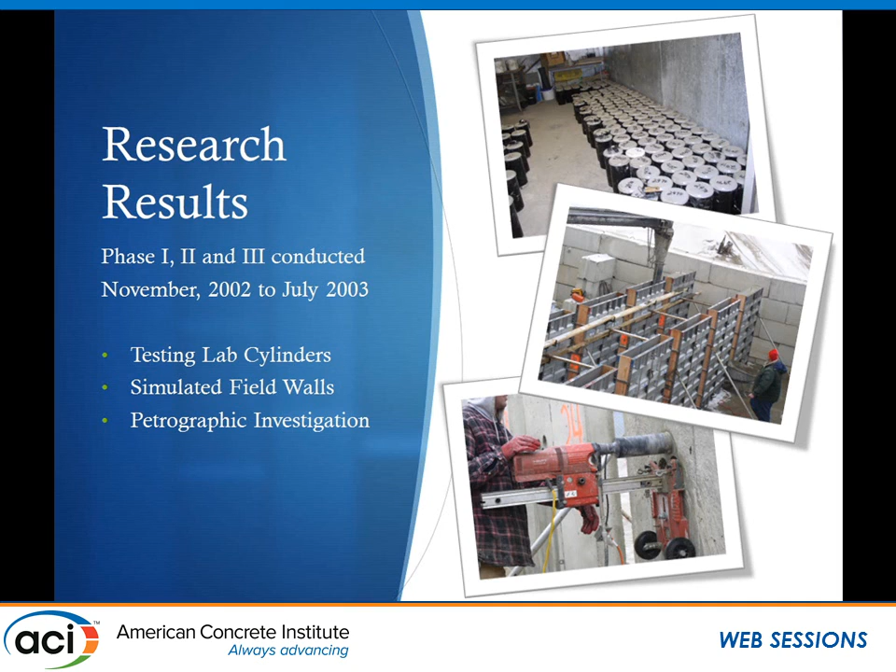What is the homeowner going to get when we walk away and that concrete has frozen or remained cold for a period of time? So those were kind of on our minds.

An excellent team was assembled. You see some variations there, from a research leader, a PE that was involved in establishing the research and monitoring it all the way through, several supplier members - Concure, you're going to hear several times today, was involved in Cemstone Concrete - and then we had a wealth of contractors contributing their time and labor, and ready-mix providers as well, so that we could get the whole job done.

So that team designed the research, and as I said, it's kind of a response to the market. We saw just incredible regional variations - at the same moment, the same winter, the same week, we could see concrete literally not being placed in Atlanta, Georgia, North Carolina, Kentucky, in the 40 to 50 degree range, but still sub-freezing conditions in the teens, maybe even in Michigan. That was a dramatic reason for us entering into that research.

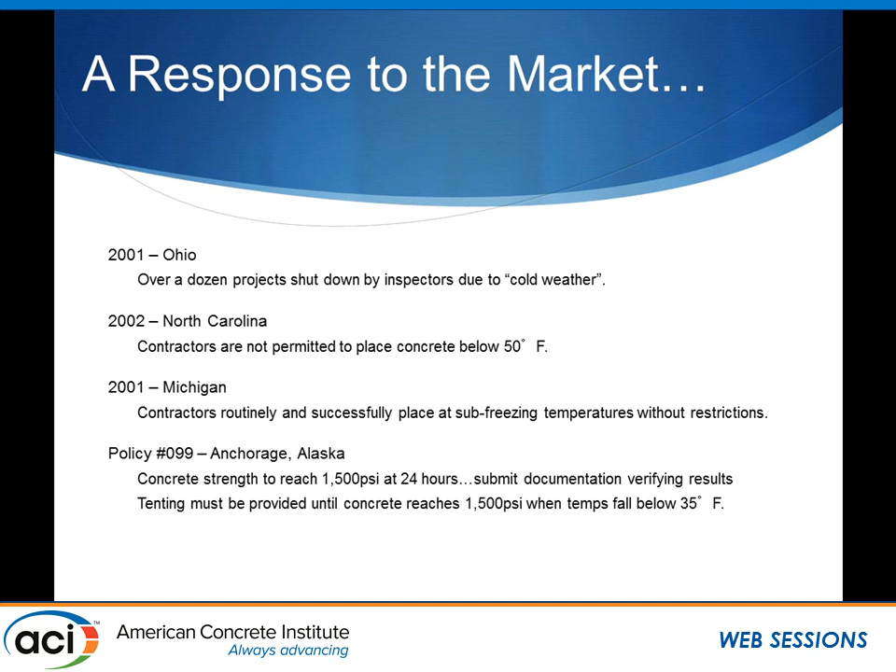Up in Anchorage, Alaska was kind of a featured spot for us, because we had a contractor where their building department would require them to tent and provide auxiliary heat for any residential foundation installed below 35 degrees, until they could determine or prove that the concrete was at 1,500 psi strength. So it was a significant cost that some contractors were having to add to their cold weather production.

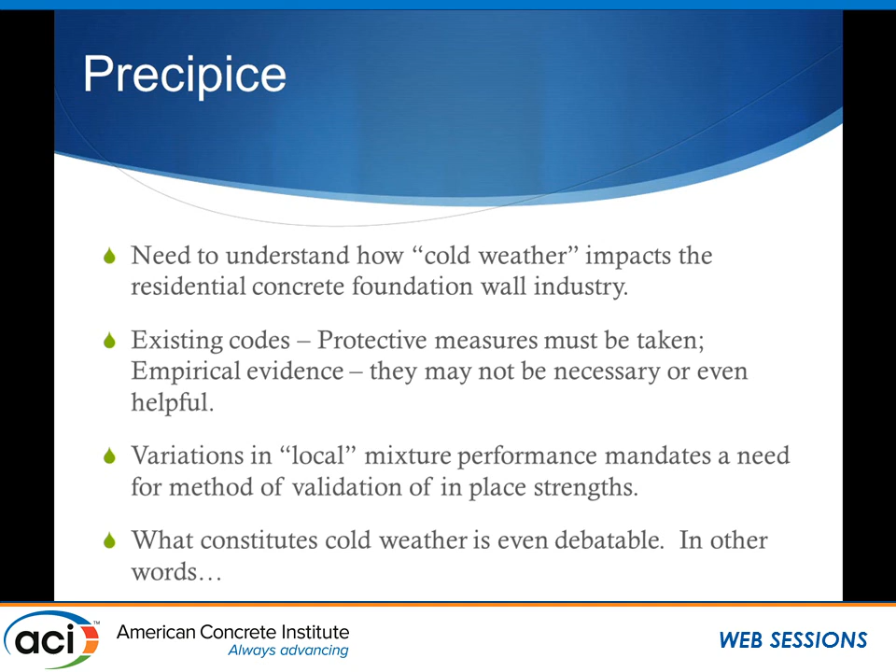So the precipice for the research really is: how cold is cold? What happens in cold weather, and what can we do to design around it and continue to improve the practice of cold weather concrete? Existing codes, guides, and specifications were excessive in terms of application to contractors, in both measure and the empirical evidence out in the field - versus the relationship to 306, for instance, which showed a departure of some 50 to 70 years of monitoring and empirical placement practice, evidence of better performance than what we were currently giving concrete credit for.

So let's look at the different phases of the research. Phase one: laboratory chillers, over 650 cylinders, representing 36 different mixtures, 44 maturity curves, because we did some of those at 50 degrees and some at 30 degrees. We really wanted to prove to Atlanta that 50 degrees isn't cold.

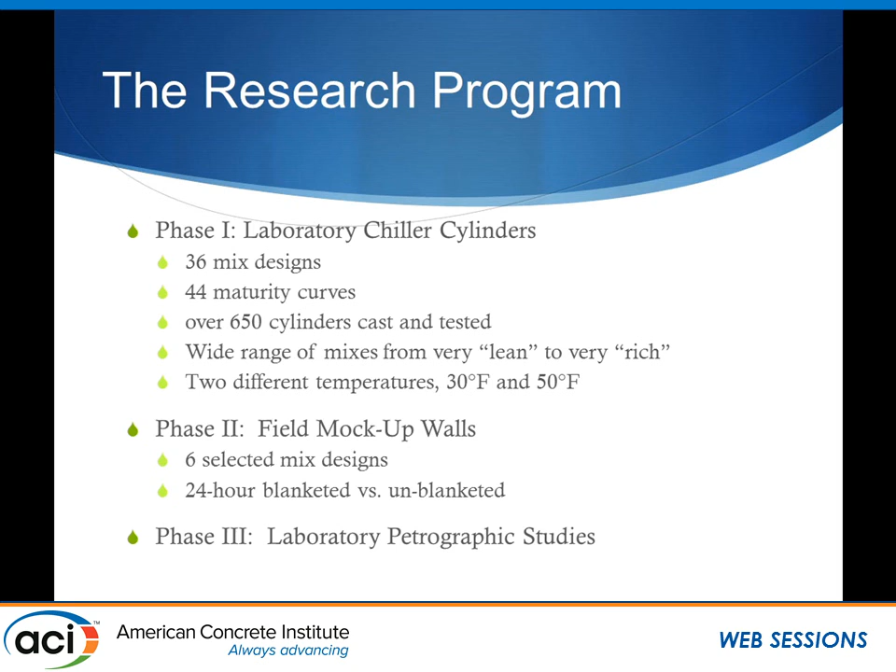Being from Iowa, we know that's not the case. The mixes range from lean to rich, so that we could get an assessment for practical steps you can take when you see target temperatures coming your way. Then when we moved into the field, with the 6 selected mix designs, we blanketed some walls, didn't blanket some walls, and then phase 3 was the petrography to determine durability.

So this is how we got to our mixes. The cements ranged from 5 to 6.5 sacks per cubic yard. They were all type 1 or type 3 cements. Each of those components were mixed with admixtures - 1%, 2% calcium, 1% calcium with a mid-range water reducer, as well as a non-chloride accelerator, a master builder's product.

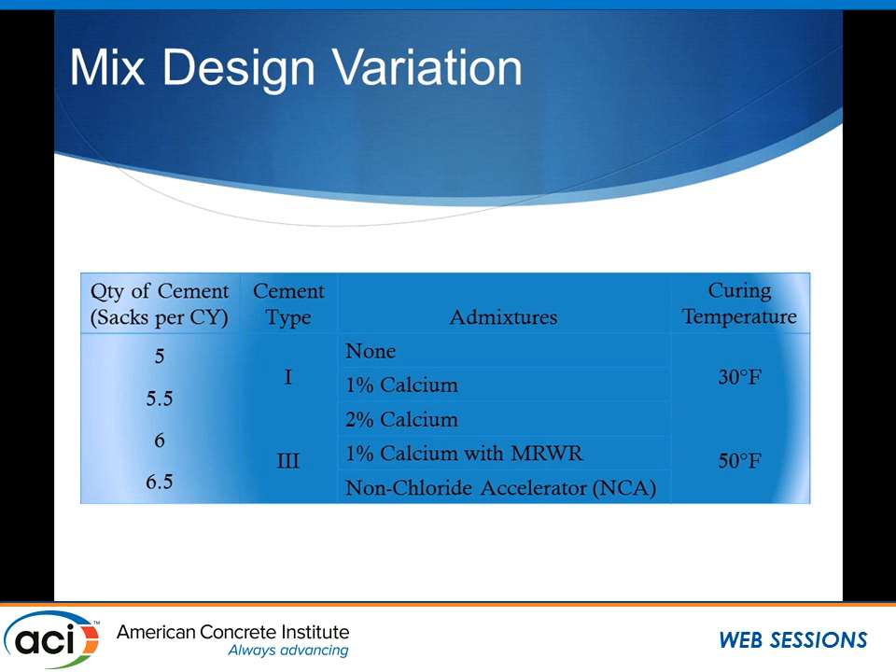The majority of the mixes, 36 of them, were at 30 degrees, and then we had 8 of them at 50 degrees. So you do the math on all of that, and you come up with the 44 maturity curves. So looking at just some of the research, to get a sense for the task that was undertaken.

This is the 30-degree chiller, and you can see the different batches laid out. At the front of each batch, where there's the double cylinder right in front of a row of 3, you'll see the temperature probes that were inserted into one cylinder for each batch, so that we could monitor accurately the concrete temperature.

This was an important part of our research, as we wanted to directly correlate the mix performance at those temperatures to a computer model that we could use to accurately predict the maturity in the field. You know the temperature curve you're expecting, you know the concrete mix design, you've proven its maturity curve relationship - you apply those in a computer and you can determine at what point you need to remove protection, or at what point you need to provide protection, because maybe you got into a situation where you weren't predicting a cold weather snap. So that can be used to more accurately decide your plan for a particular placement.

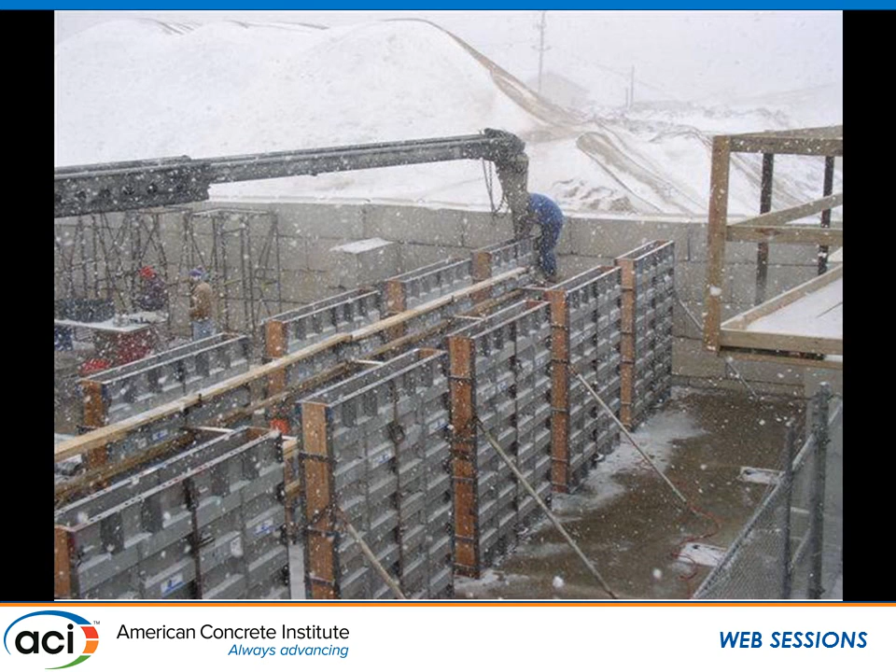When we went outside, we got the best of all worlds. Now, first of all, if I go back just a moment to the chiller, you'll notice that this is a cold weather chiller. It's 30 degrees. It's held at 30 degrees.

It's not ASTM moist cure 70 degree cylinder testing. So we were really abusing the concrete from the start in our phase one, and we really did it some injustice when we got outside. And this is the environment that our contractors are facing, and there's an economic impact in not being able to place concrete in these conditions. Builders are wanting the houses to turn. Homeowners are ready for their home. And if you have to wait 3 weeks or 2 days or whatever the delay is going to be, there's a significant impact to the economic flow of those projects.

When we started the placement, wall number 1 up there in the upper left, visibly snowing. It was cold. I'll show you the daily temperature range at the time. And the temperature was falling, and Ken will appreciate there's no sunshine, so had somebody been out there with a handheld infrared, we've been relatively accurate with our temperatures. Our concrete temperatures, everything was mixed indoors, everything was heated, all of our aggregate concrete was delivered at 65-degree target temperatures. So we wanted to simulate what the environment was going to be at a placement of this nature.

And we even had the benefit of a semi-excavation feel. You can see at the ready-mix supplier, the block retaining wall that they have behind there kind of protects it from prevailing winds, much like an excavation in a residential foundation might be.

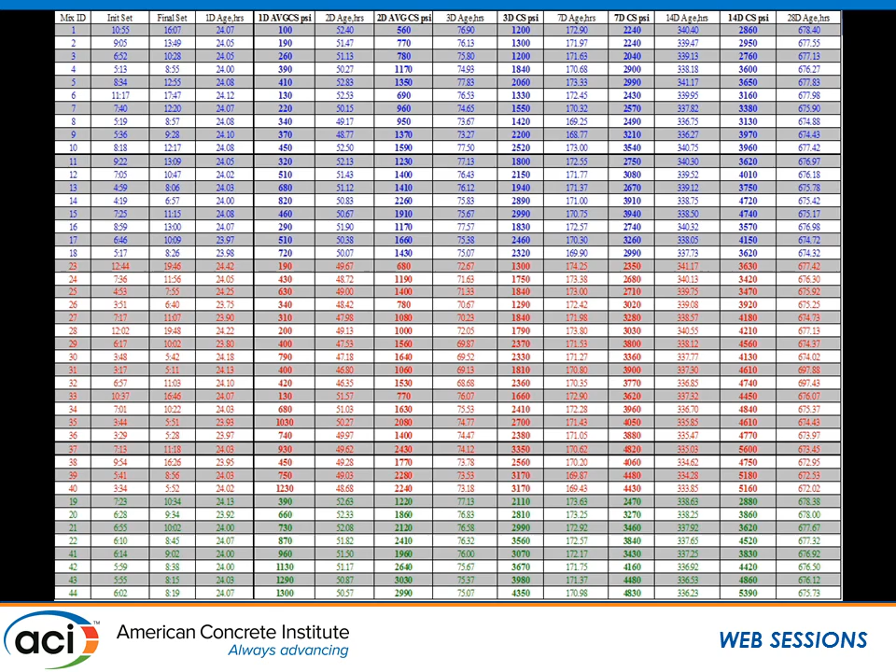So we really were trying to get an accurate assessment at a maintained 30-degree temperature how these concrete mixes would perform. So in essence, at the time that we built this research, we really felt that this was designed to worst case scenario. We could not design a more appropriate way to measure the impact of maintained cold temperatures on concrete maturity in a lab scenario.

We certainly could not have imagined much worse of a case, or wanted to endure, maybe I should say that, endure much worse of a case in our field studies. So the concrete was really, it wasn't babied. It wasn't set up to succeed. It was set up to fail. We wanted to see what the true performance of that concrete would be as it relates to the environment.

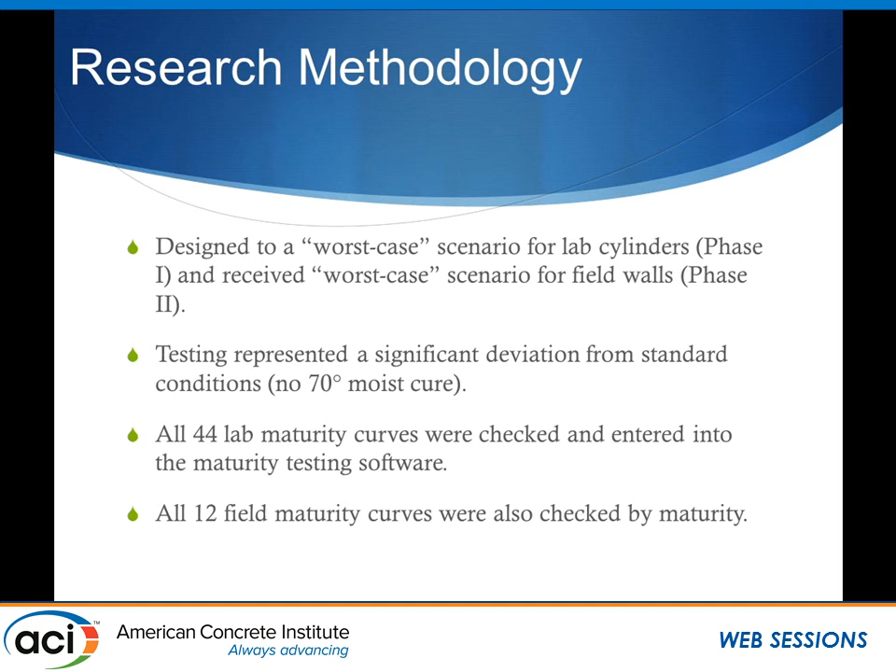And this is an example of what we found at the site. And this is the weather data, NOAA weather data for Cleveland, Ohio, which is where our research was done, beginning January 10th, 2003. You can see that the high for the day was 33 degrees. The average was 27. We were placing, and when they started placement of that concrete, it was in the 31 to 32 range and falling. And then, if you can read that chart, beginning on the 10th, it never got above freezing for 21 more days until the end of the month.

And on the 31st of January, it finally got back above freezing, 39 for the high, low of 12 and an average of 26. So this concrete, by most practical applications, was frozen for 21 days. It was certainly really, really cold for 21 days. Because you'll see a lot of single digits right through the middle of that 21-day cycle.

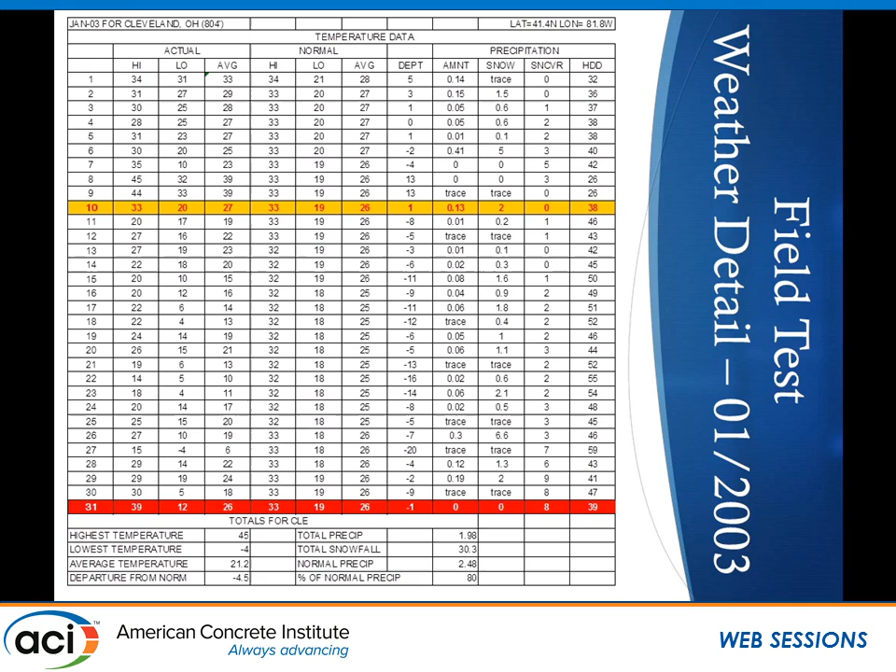More about the physical test, the walls themselves, and really the lab data, the 650 cylinders in the lab - that was to set up what we would find on the field. It was to set up our computer models. It was used to validate the maturity method as an accurate prediction for concrete strength. This is where we really wanted to see the impact.

And so you see the forming panels being removed from those walls. That was the next day, some 24 to 30 hours - just maybe a day and a half after the concrete was placed, we removed those forming panels. So that concrete is also rather green at that point, even in a normal condition.

I've got 5 minutes left? You're kidding me. All right, so you like that. All right, 5 minutes, wow, all right. So let's show you a little bit about the graphs, and you can get to me if you want more detail. But this is what a maturity graph is going to look like. This was our validation of the testing labs. It really seemed like Ken talked longer than 20 minutes. All right, thank you.

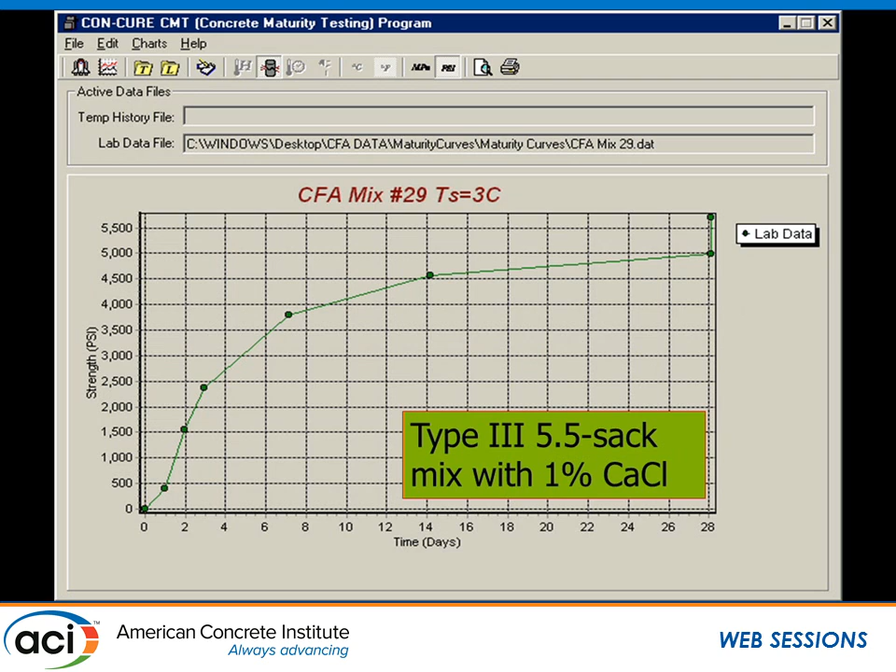Mix 29, so the Mix 3, Mix 29 - these were two of the selected ones we took from the lab out to the job site. Just to show you the difference, this is a Type 1 5-sac mix with 2% calcium. This is a Type 3 5.5-sack mix with 1% calcium. So you would expect higher strength - Type 3 cement, higher strength, should be a higher maturity, and you can see that the strength did gain at a rapid pace.

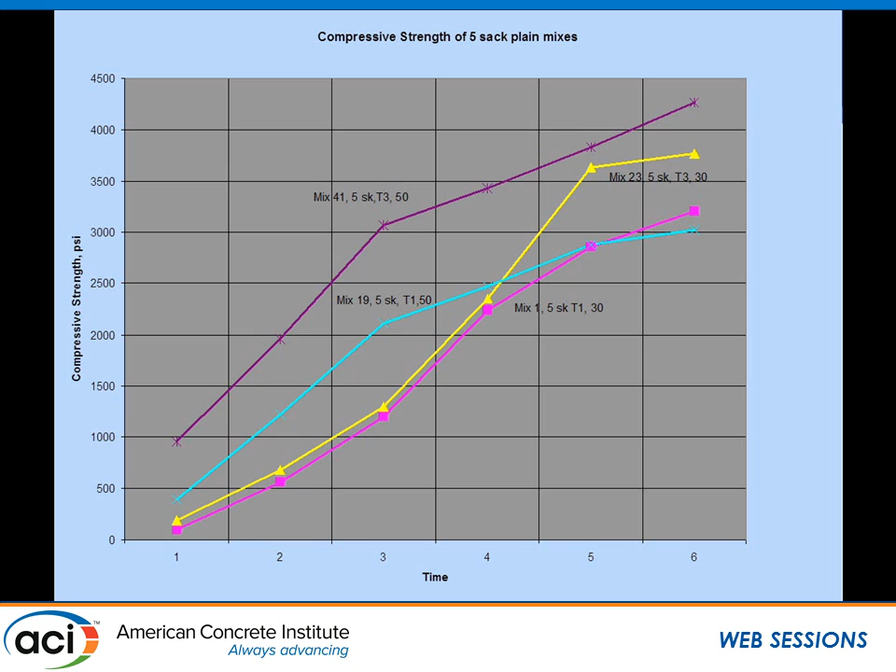What this research really allowed us to do was to look at the performance of all these different mixes and find one that we liked, or find one we thought we could apply to a given situation. So these are all of the 5-sack mixes with Type 1 and Type 3 cement - two Type 1 cements and two Type 3 cements. These are the 4 5-sac mixes with no admixtures, and we get a really good relationship of the impact of Type 3. And there's the 30 and 50 degrees represented there as well, so you would expect the 50-degree temperatures to mature at a higher rate.

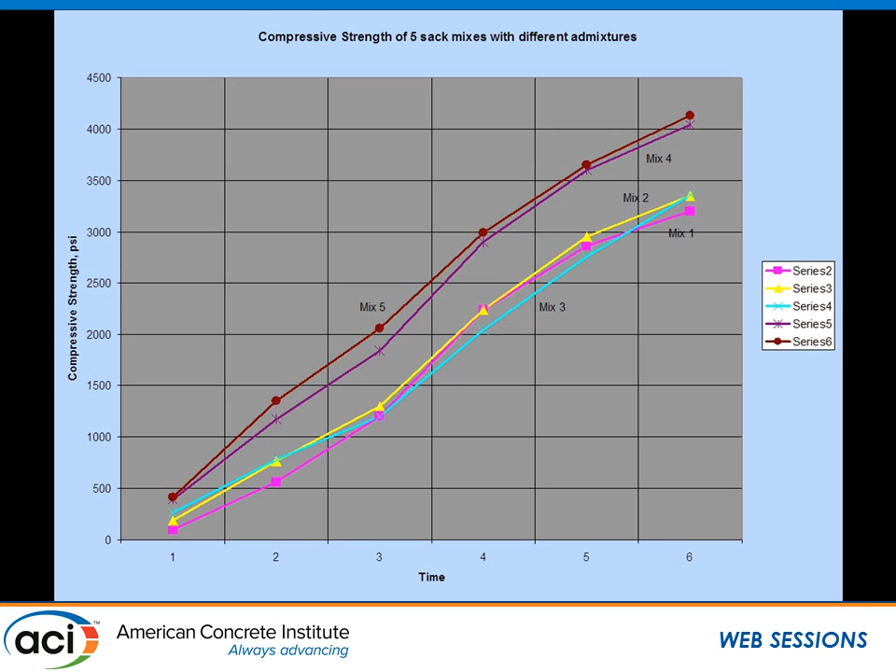This is the 5-sac mixes with the varying amounts of admixtures: no admixture, 1%, 2%, 1% mid-range, and NCA. And so we can get a sense that the 1% with the mid-range and the non-chloride accelerator are the top two lines, and the 2% cal, the 1%, and the no cal were clumped rather closely together there.

This is just kind of to summarize the data for you, giving you a layer looking at 5-sac, 5.5, 6 with the 2% cal and the 1% cal in a table showing the maturity prediction of each segment along the bottom line. So if we look at 5.5 sac, Type 1, 2% cal, the second set of 3 lines, the maturity prediction was 280, 580, 940, and 1690 at 1, 2, 3, and 7 days. We were actually measuring in the field from the cylinders, or from the cores cut from these walls, 400, 590, 1,000, and 1815. So you can see there's a pretty strong correlation between what the computer model predicted after the lab studies, and then applying that to the field, what our prediction was truly going to be.

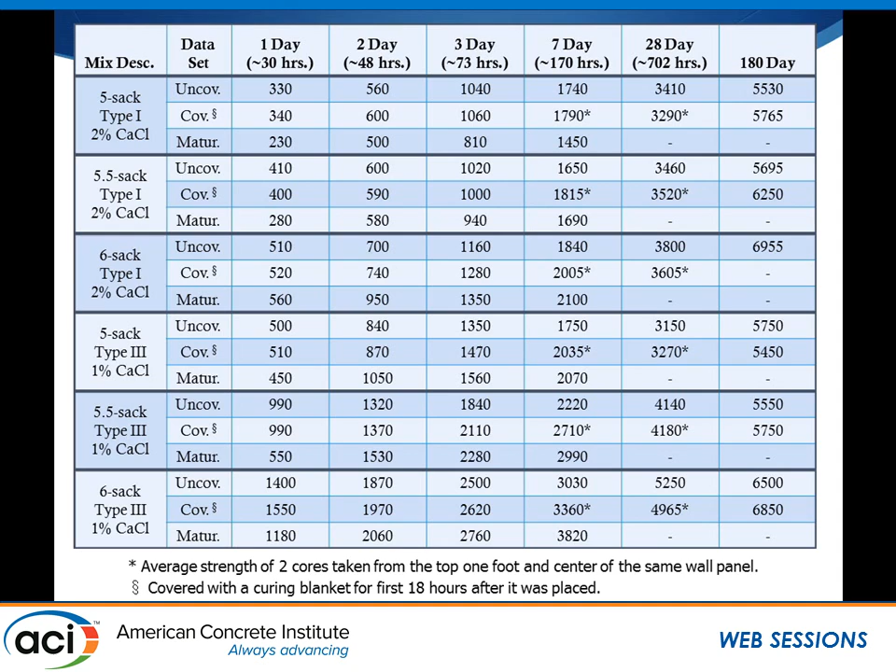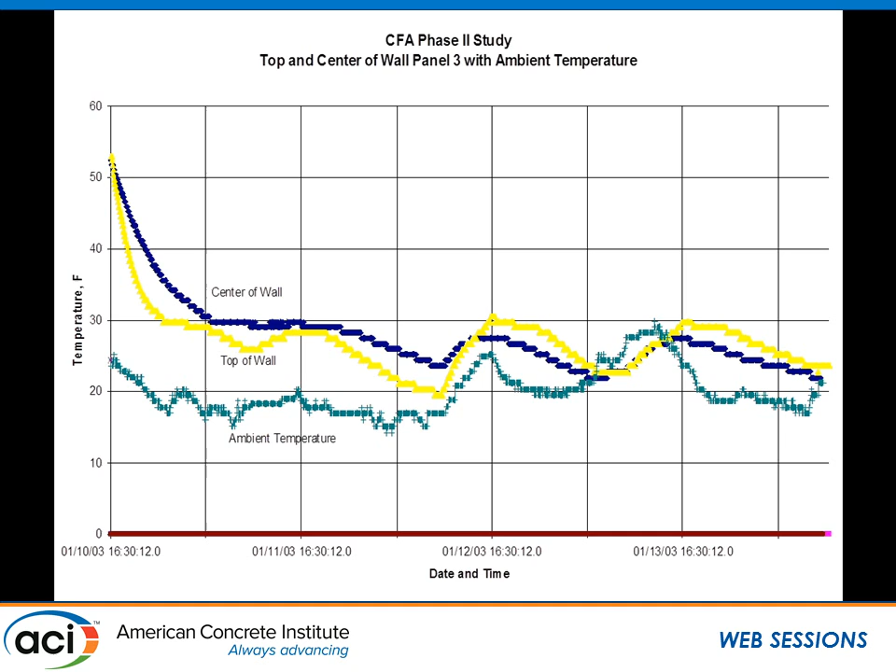This is just kind of showing you how we monitored it - this is the unblanketed wall, top of wall in yellow, center of wall in black, and I'm going to lay that over with the blanketed wall. So we did get an idea that the blanket for an 18-hour period made a significant impact on maintaining the temperature. Now the top of wall, the blue line of the blanketed sample, is significantly higher than the top of the wall for the unblanketed, and the center of wall is up above what the top of wall was. So from a contractor's perspective, a very simple application of a 6-foot blanket for the first 18-hour period in a cold weather snap gave them a good boost, a nice strength gain early on in the wall.

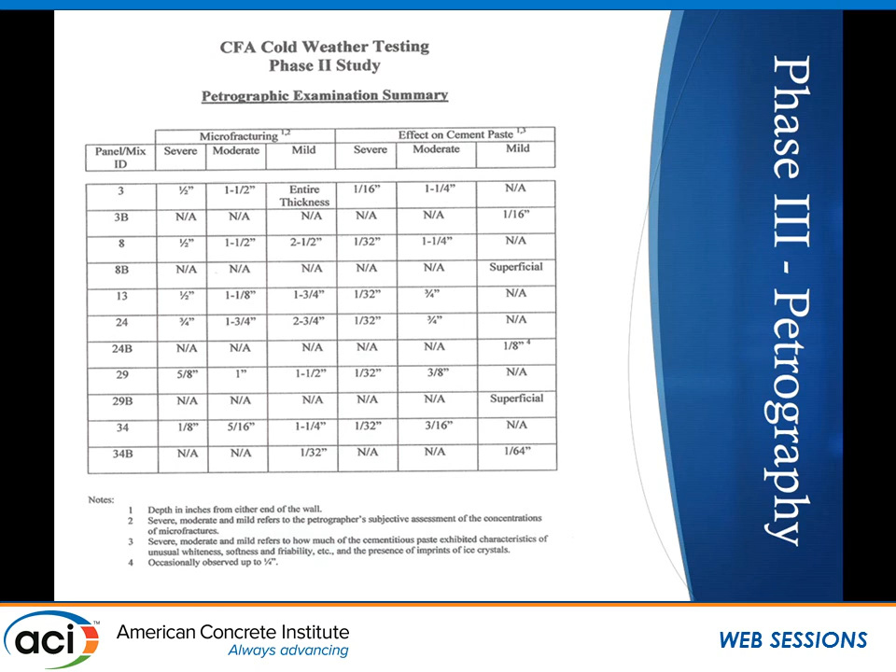The petrography - just a simple graph showing the difference between the unblanketed and blanketed walls. Again, the idea of a small blanket for the first 24-hour period: every single one of those mixes, from Mix 3, which was a very lean mix, to 34B, which is a rather expensive and rich mix, all exhibited July-like concrete qualities. The petrographer's statement was, 'If you hadn't told me these were winter samples, I would not have been able to tell you what time of year these cores were taken from.' The concrete was that solid, that durable.

My last point before I'm pulled off stage: this research now allows contractors to look at target temperature conditions and decide how long they have until a cold snap is coming, and how long they need protection in place. It's this type of graph that allows them to dial that in.

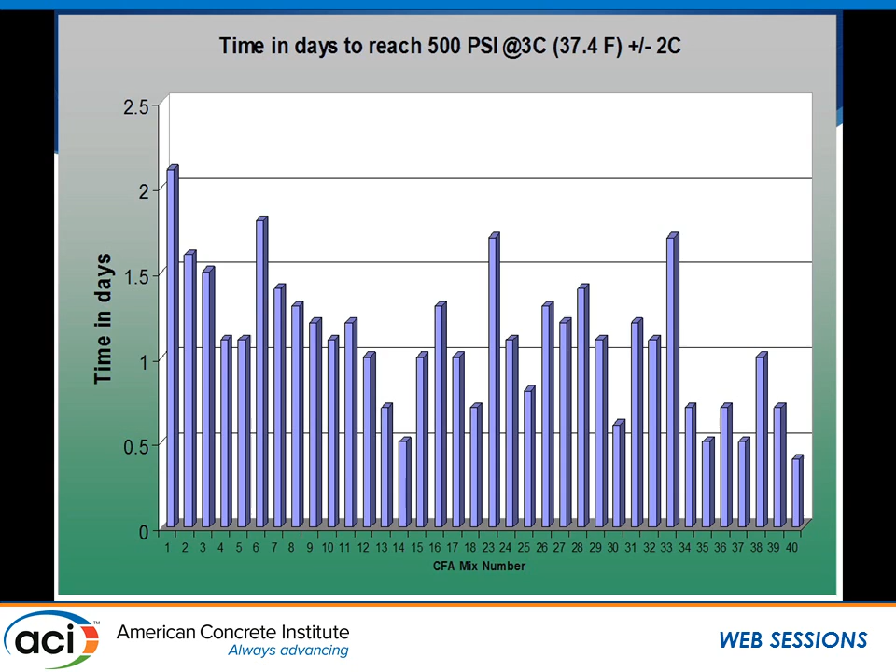All of the mixes along here are looking at different rates to 500 psi. This is ranked from soonest to 500 psi to longest, and then resorted to fastest to 1,000. Based on a specific project requirement or temperature condition they're looking out for, we can give them direction on the type of mixes to employ.

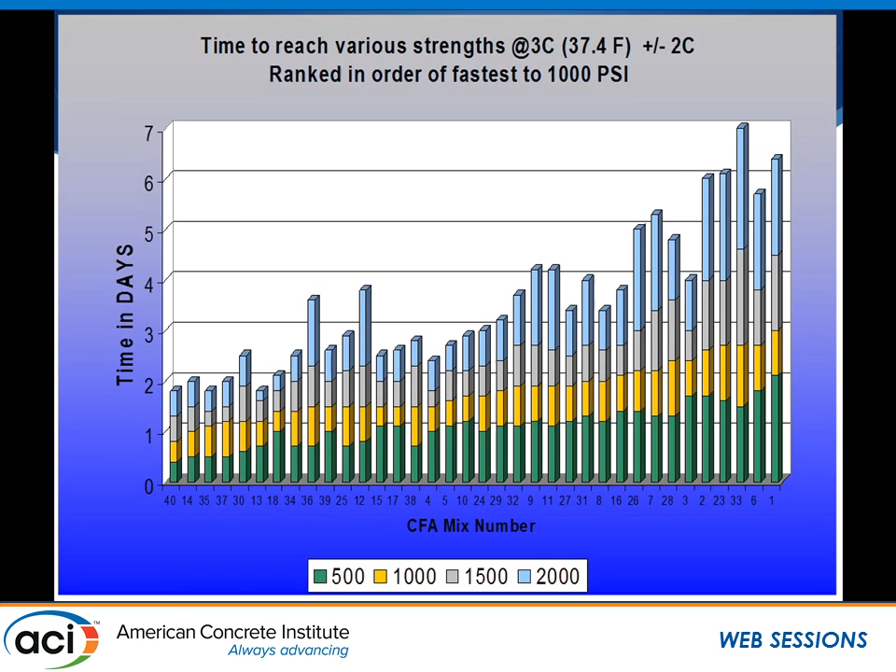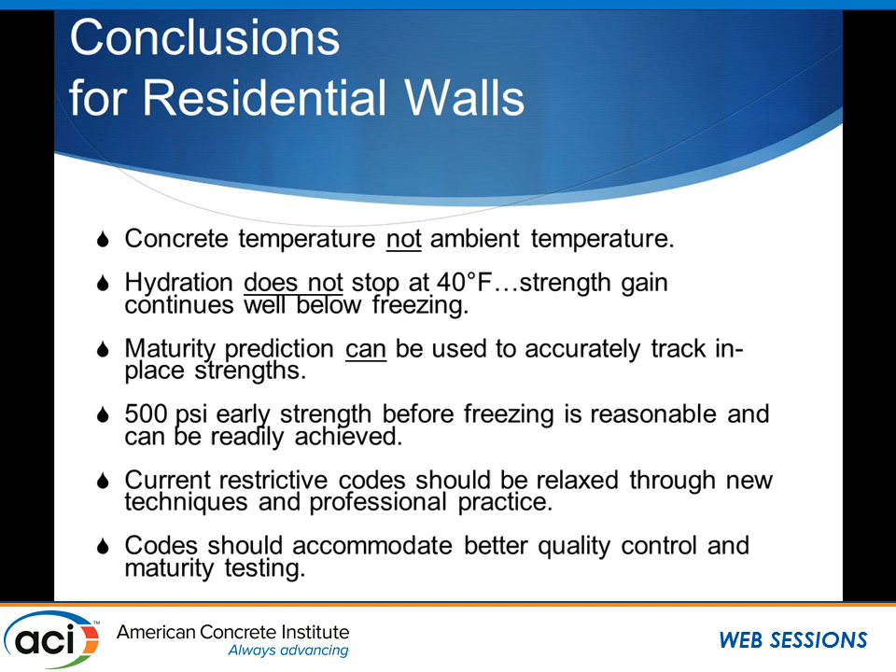So we learned concrete temperature is really the predictor. Ambient temperature influences it, but an inspector shouldn't target a contractor or stop work based on what that ambient temperature is. We can truly design concrete performance to positively impact the project at any ambient temperature. Hydration doesn't stop at 40, which was a popular theory we were hearing from the field, and maturity prediction can be used accurately. There's also no single mix that's the answer.

Pour early in the day. Type 3 cement, if you've got it in your market, is expensive, but it will give you better performance over Type 1. Calcium chloride, when steel's not present in the structural application, is a great bang for your buck.

So some of the things contractors already knew, we were able to validate through this research, but then correlate it so they can now use it and start designing new mixes with their ready mix producer, or a fleet of mixes they could use at different temperature ranges.

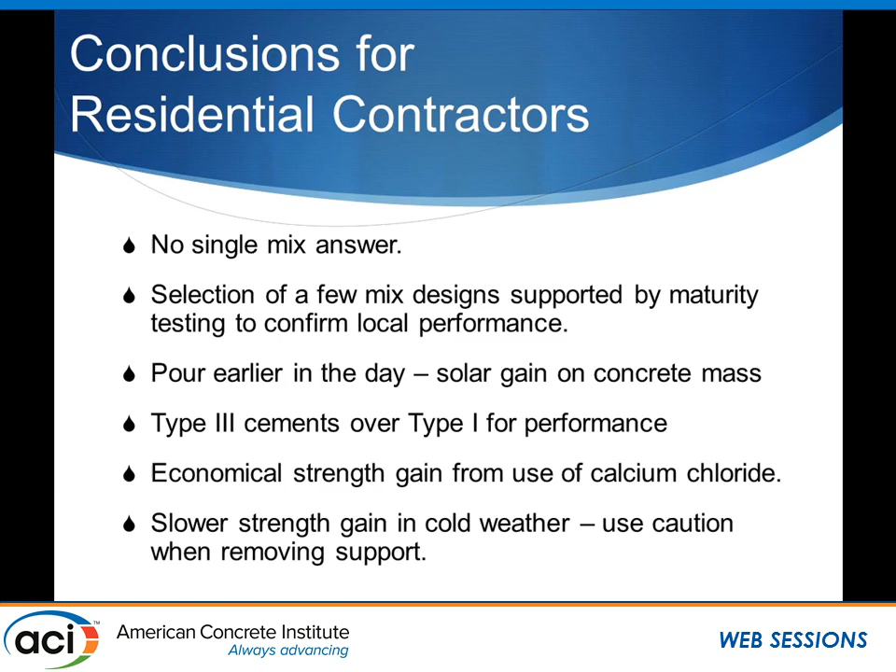You were saying earlier that you needed your aggregates and your water heated in this study, right? I'm from North Carolina, so I find it interesting that you put North Carolina up there. One issue we have is nobody in our market heats aggregates, and well over 50% of the plants don't even have a hot water source for winter. So what effect will non-heated aggregates and non-heated water have on concrete temperatures, and what effect might that have on strength?

We didn't test that in this research. We delivered all of our concrete as if cold weather practice facilities were available to deliver target temperatures in the 65 degree range. What you'd get without that is a much closer delta T to ambient temperature for your delivery temperature, so you'd have to be more concerned about the hydration boost you get after placement.

What we did do, though, is validate the maturity method. So if you knew what your concrete temperature was and your ambient temperature prediction curve, you can still correlate the data to the same research results we have.

The last couple of winters we've had were very difficult. One thing I can tell you is we have a very difficult time with plants that do not have hot water sources, even getting to 50 degrees.

Sure. So what you'd do is look at those plants, and contractors would want to look at their availability and pick mixes and protection types to sustain those temperatures higher, because you get a lower delta T. And that's why code officials in North Carolina make the decisions they make, based on understanding what drives code officials is a lot of the availability of the market. Good point.